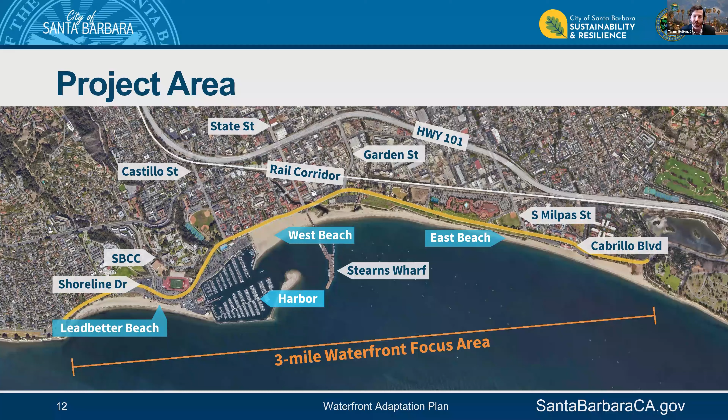Because of its location and elevation, it's a place that's particularly vulnerable to coastal flooding, coastal storms, and coastal erosion. The waterfront has a shoreline that has only ever told one consistent story, and that is ever changing.

From the thousands of years that the Chumash lived along a naturally shifting coastline of dunes, wetlands, and beaches that was naturally reshaped by winter storms and currents, to the creation of Stearns Wharf in 1872 that fixed a point on an otherwise ambulatory coast and created a permanent industrial edge that spurred year-round use to our waterfront.

The shoreline was forever changed when the harbor was built, which trapped sand that would otherwise move with currents down the coast and has created the beaches as we know them today.

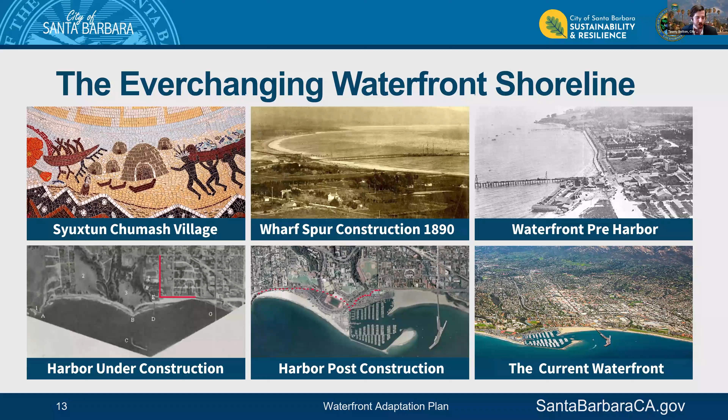We now find ourselves at that next major inflection point when we must take deliberate action to address the impacts we faced during recent storms and the challenges we anticipate to see in the future with continued sea level rise, to save our sandy beaches, to protect our harbor, and to protect our inland areas.

For the purposes of this project, we are primarily focused on two broad categories of hazard impacts. The first is the area where waves are actively crashing and causing damage, and the second is the inland flooding that occurs from the ocean.

At the end of the day, it's truly not sustainable for us as a city to spend $3 million in cleanup and repair costs from a single large coastal storm like we did in 2023, which is one of the core reasons why we're doing this work effort.

And during that high water level condition, we see that the ocean was right up to the ice plant and in some cases spilled up and over onto the bike path.

This is important because over time, as the shoreline has migrated inland as its beach has eroded, not only have we lost access to the recreational component of a sandy beach area, but as that shoreline has moved inland, so too has the risk of hazard impacts to the area around that.

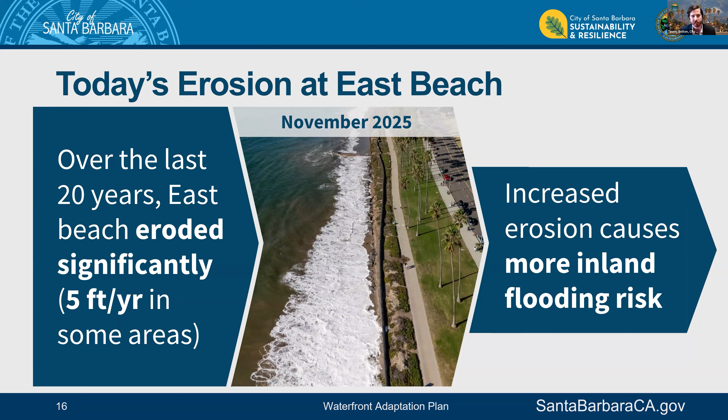Thankfully, there are different dynamics along our coast, and during the same time period of analysis, Leadbetter was a generally stable beach, and West Beach actually grew slightly during the same period.

When we look forward in time, we see that our risk profile will evolve and our challenges will only grow with continued sea level rise.

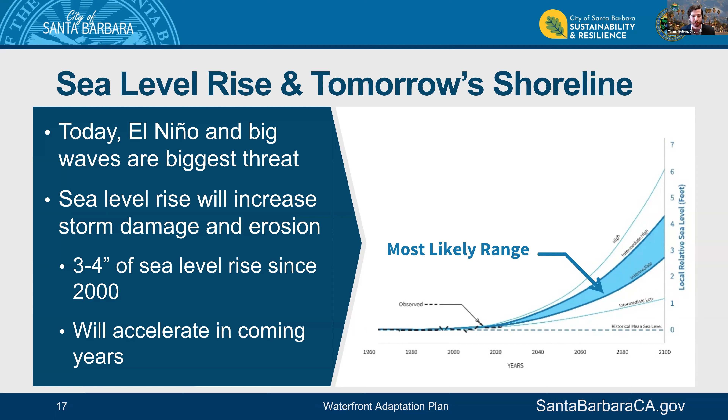As a quick data point, we've experienced 3 to 4 inches of local sea level rise relative to the year 2000 based on our local buoys. And we anticipate that that value and rate of rise will only accelerate in the coming years, which will create quite the challenge. Before we dive into the waterfront, I want to take a quick moment to really zoom out

This is important because over time, as sea levels continue to rise, the shoreline will continue to get squeezed out as that shoreline marches inland, making access to dry sandy beach less and less with more and more tidal conditions over time. This will increase the importance of and the demand for our low-lying waterfront beaches

which is a core reason why during this project, we are really trying to focus on preserving and maintaining that sandy beach experience along our waterfront area for as long as possible.

Shifting now into the waterfront itself, this and the following slide show the future position of our shoreline with sea level rise.

These projections assume that all of our existing infrastructure remains, all of those historic processes remain, and all the current management decisions continue, including dredging at the harbor. What's new is the addition of sea level rise on top of those historic and current processes.

The green line, closest to the ocean, represents 0.8 foot of sea level rise, or the shoreline in about the year 2050. The middle red line is 1.6 feet of sea level rise, or the year 2065. The inland-most blue line represents 2.5 feet of sea level rise, or the shoreline position in about the year 2075.

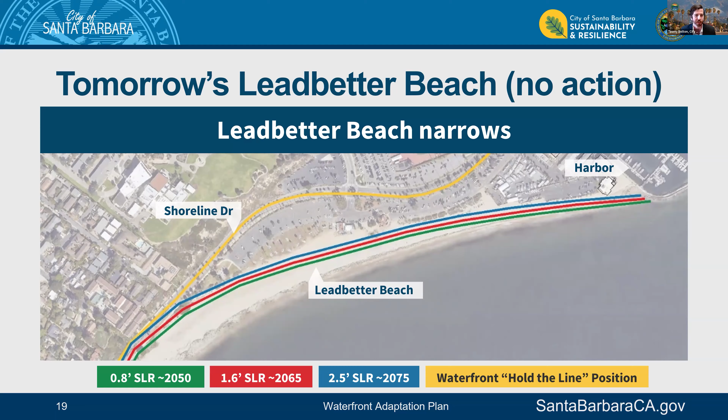Starting at Leadbetter and working our way east, within the next 50 years or so we could essentially lose a good portion of the sandy beach area along Leadbetter, with it essentially lost in front of the harbor commercial area and faring a little bit better in front of Shoreline Cafe and the Leadbetter picnic areas.

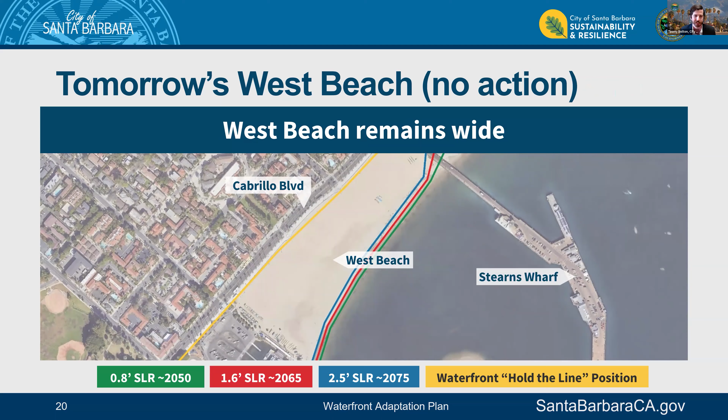Looking at West Beach, we see that it too begins to have some erosion, but it remains wide and sandy, well beyond the 30-year focus of this work effort, which creates this profound opportunity to really focus on West Beach as a sandy beach destination. This is important, especially in the context of East Beach.

As I mentioned, we have this challenging historic erosion condition, and when you add sea level rise on top of that historic challenge, that challenge only grows. Based on our analysis, essentially the good portion of the sandy beach area could be lost by about the year 2065. And at some point between 2065 and 2075, this entire area could erode all the way back to Cabrillo Boulevard, which creates quite the challenge.

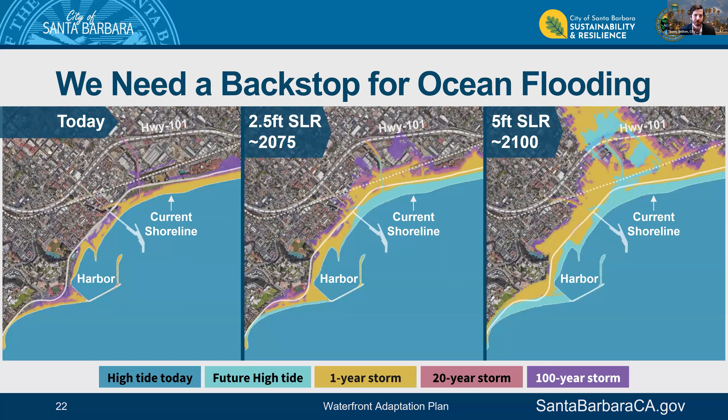What we see is that today, when we have a really big coastal storm, Cabrillo Boulevard and some of the areas just on the other side of it are already at risk of flooding from the ocean. Over time, with continued sea level rise, the extent and magnitude of that risk only grows. The point here is to emphasize that we need some sort of vertical protective measure, something raised above grade, to prevent water from the ocean from flooding our lower downtown, our inland areas, and our inland neighborhoods.

While I want to emphasize that we certainly have a challenge on our hands, it's truly not all doom and gloom, and there is a toolbox of proven solutions. We often get asked, can't you just put in a continuous seawall or rock revetment along the entire waterfront and call it good? To a certain extent, we could.

These types of hard engineered solutions do a pretty good job of protecting what's directly behind them. The massive trade-off, though, is that because they're hard structures, waves coming in bring energy with them, hit against these hard structures, and redirect that energy to the soft sand around it. The byproduct is that it can erode those beaches around them and narrow the beaches far faster than if we didn't have those hard structures there at all.

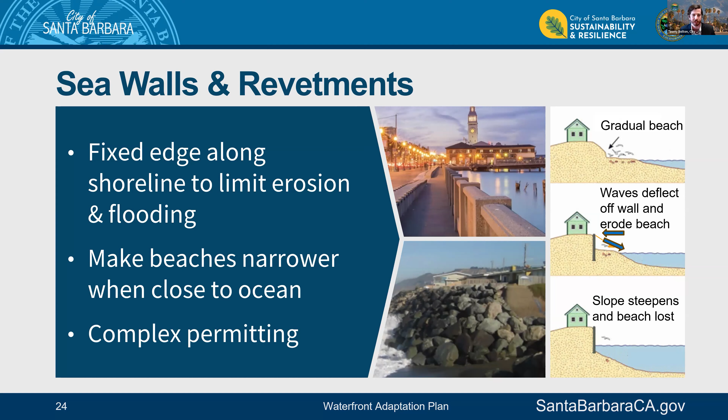So if we have this high-level goal to really preserve the sandy beach experience, using these hard structures as a widespread solution can be counterproductive to that ultimate goal. That said, they can make sense in certain locations where you have critical infrastructure like the harbor that can't be easily moved. Beach nourishment, sand berms, and dunes are softer solutions that either mimic or restore natural processes as part of nature-based approaches to help widen our beaches.

We do some of these things today, including using seasonal sand berms. Their primary Achilles heel, though, is that if you have really big storms and big waves bashing against them, they can be quickly lost to the sea or pushed inland.

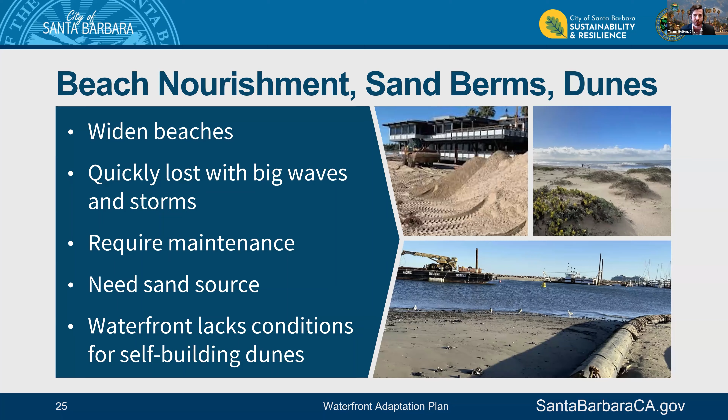One of those early photos that showed the Harbor West and Leadbetter parking lot areas covered in sand—that sand came from a seasonal sand berm that was previously located in front of that parking lot, had been hit with some big waves, and then was pushed into that parking lot. Because of that, they require regular maintenance as well as a sand source to create and maintain these types of systems.

Groins, headlands, and artificial reefs are another option within the toolbox. These are structures that extend perpendicular to the shoreline out to sea and can help widen sandy beaches by trapping sand that would otherwise move with currents down the coast, similar in a lot of ways to what our harbor does today.

The primary trade-off with these approaches is that because they trap sand, they can create downcoast impacts and starve downcoast beaches of sand. This can create significant political and legal liabilities and also makes them challenging to permit. These approaches require expense both to install and to maintain over time, as well as an external sand supply to ensure they stay full of sand and don't create those downcoast impacts.

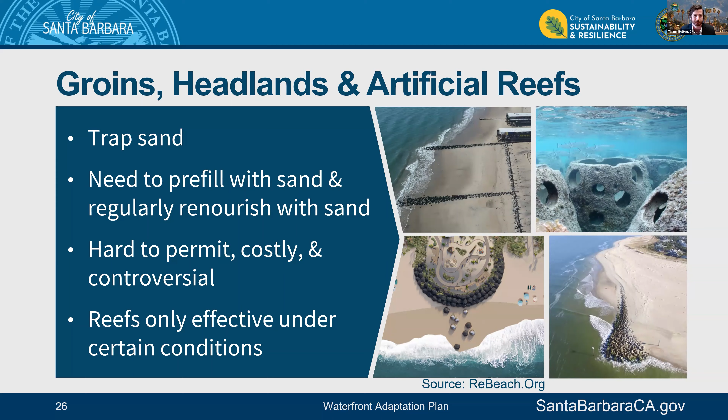Fundamentally, relocation or removal of development has to be part of the conversation if we're prioritizing the sandy beach experience. It's a great way to take assets and infrastructure currently in a risky hazard area and move them out of that area to address the risk. The challenge and trade-offs come in that some things aren't easy to move, like the harbor.

Some things don't have replacement sites available for them. You also have to consider impacts to uses, revenues, and existing leases when talking about moving existing businesses or revenue-generating assets, to consider how we will continue to fund and maintain the waterfront, as well as pay for some of these infrastructure improvements.

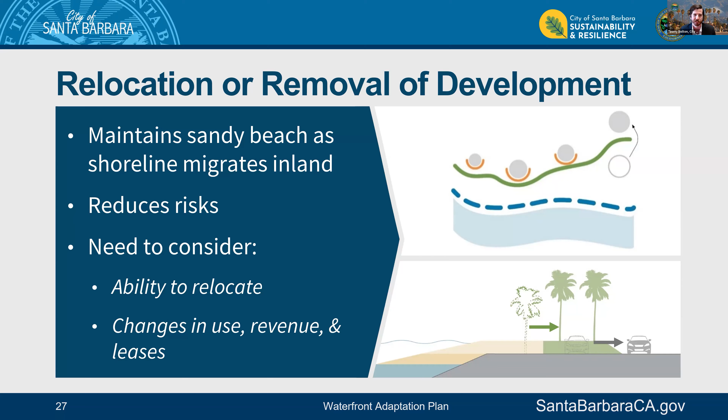I know I've talked a lot about coastal hazards, but I want to emphasize that we're taking a holistic approach to this project. If we're going to do this massive infrastructure investment to our waterfront area, why not also do it in a way that improves the experience for all of our users?

The ideas on this slide are all things we heard during our initial community engagement campaign when we asked what people love about the waterfront and what we could do better. A key thing we heard is that there needs to be a safe way to walk and bike throughout the entire project area. There are notable gaps in the network today, namely in the Harbor West and Leadbetter parking lot area, shown in that top left graphic, where users are walking and biking through a parking lot without separated space, creating potential conflict with cars. That's one thing we plan to address through this project.

West Beach is challenged today by how the storm drain system operates. The storm drains outfall below the ultimate level of the sand, which creates pooling and compaction issues, shown in that middle photo. That's something we plan to address and really reimagine this space.

There are certainly great moments and places along the waterfront, but there are also spaces that aren't necessarily as connected or welcoming as they could be. This is a theme you'll see embedded in some of these ideas later, to really improve the urban design experience for all of our users.

We've heard clear demand for additional facilities, everything from boat storage to bathrooms, so you'll see that included. We also see a clear need to enhance economic vitality, both to support our local economy and to look for ways to generate revenues to help fund some of these infrastructure improvements. Finally, there's a rich history of recreational activity along our waterfront. We want to celebrate that and have it continue forward for as long as possible.

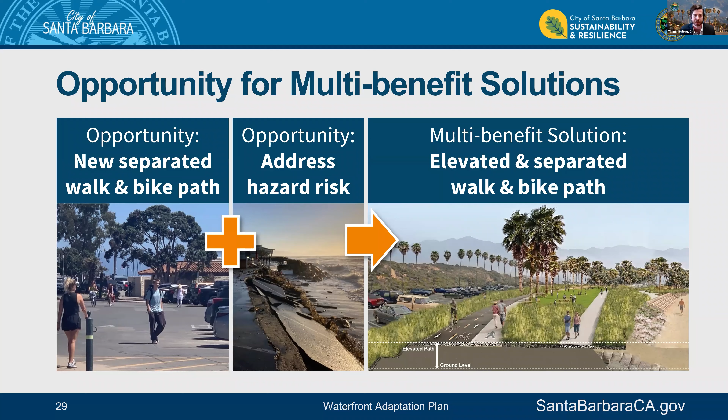But it could also include that raise component, which provides that vertical element required to prevent our inland areas from being flooded from the ocean when we have big storms and high water levels.

So taking this all into consideration and pulling together a preliminary list of things we're considering studying further in the next project phase to ultimately build towards a recommended solution and approach, we have 4 primary goals as shown here.

It's really first and foremost all about saving that sandy beach experience and enhancing recreation for as long as we can. It's protecting the commercial working harbor in place, boating and all of its coastal dependent uses. It's protecting our inland areas from flooding from the ocean, and it's providing a safe and separated way for our folks to walk throughout the entire project area and portion of the waterfront, ideally designed in a way that also provides that flood protection component.

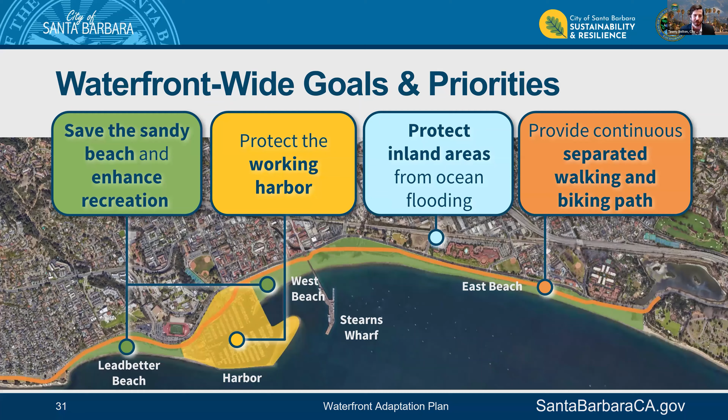For this project, we primarily envision 3 types of projects. The first are the so-called quick wins. These are the low-hanging fruit, lower cost, just-do-it type projects that can largely be accomplished with existing city budgets. These are things like restriping parking lots, minor drainage improvements, and using temporary flood walls when we have storms to provide some flood protection. These are things we would begin doing as soon as the plan's adopted.

The so-called core measures are really the bread and butter focus of this work effort. They're the things that provide comprehensive and holistic hazard protection for at least the next 30 years or so, things like that elevated walking and biking path.

We're also considering so-called future options. These are things that aren't necessarily required for the types of hazards we anticipate seeing over the next 30 years or so, but are things that could be required later in time, or are things that fundamentally change the physical dynamics of the coast, things like groins, things like headlands.

The way we see these projects coming together is that the quick wins are stopgap measures while we work on funding, permitting, and ultimately constructing those core measure projects, which we would begin working on immediately after plan adoption, and would be required regardless of which future options we ultimately consider.

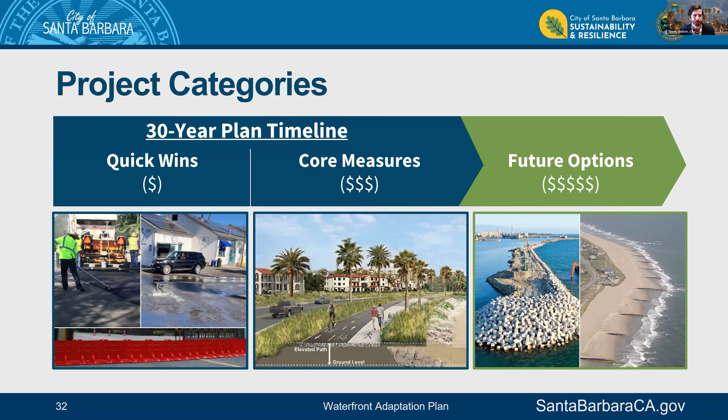So diving into it, starting first at Leadbetter Beach, and then we'll work our way east through the project area. The vision for this space is really all about a sandy beach and recreation destination.

The quick wins here are intended to address the pressing safety and flooding fixes. From a safety standpoint, we really mean the transportation safety component, so exploring this idea of taking the edge of the paved area and restriping it in a manner similar to what you see in that top left graphic, where you have separate space for folks to walk and bike.

Also exploring the use of temporary deployable floodproofing measures in front of Shoreline Cafe, as well as the Leadbetter restroom. Exploring the use of a low curb wall at the edge of the paved area to provide that protection and prevent it from undermining and collapsing into the ocean, like we showed in one of those early graphics.

And because there's the potential to displace some parking by providing that new restriped area to walk and bike, we're exploring capturing some unused space that's adjacent to Shoreline when it comes down the hill. There's unused space between the roadway there and that parking lot, and so we think by expanding that parking lot a bit, we can capture some additional parking spaces over there and in balance end up with more or less the same that we currently have today.

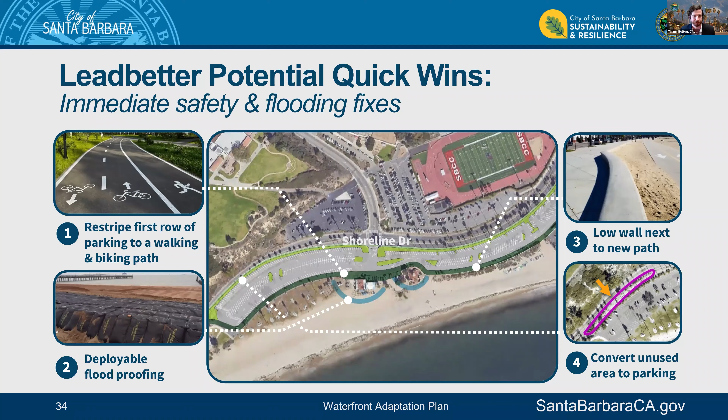The core measures are really all about this idea of saving the sandy beach by strategically moving things inland over time. Exploring the idea of taking area that's currently park and converting that to sandy beach, taking the area behind that and converting that to a park-like area that could also include space for relocated facilities and assets. And then behind that, have the elevated walking and biking path to provide that safe transportation function, as well as that ultimate backstop when you have big storms, when you have high water levels, to provide that inland flooding protection.

I do want to mention that when we're talking about strategic relocation, these things can be done in phases or based on triggers. So as an example, Shoreline Cafe or the Leadbetter restroom could be relocated when we have replacement facilities available or when we reach specific thresholds on the ground, like when they're no longer safe to operate and use.

As part of this exercise, there's the potential to impact some existing parking within this area by strategically moving things inland. So we're exploring opportunities to provide replacement parking outside of the hazard area on the north side of Shoreline Drive.

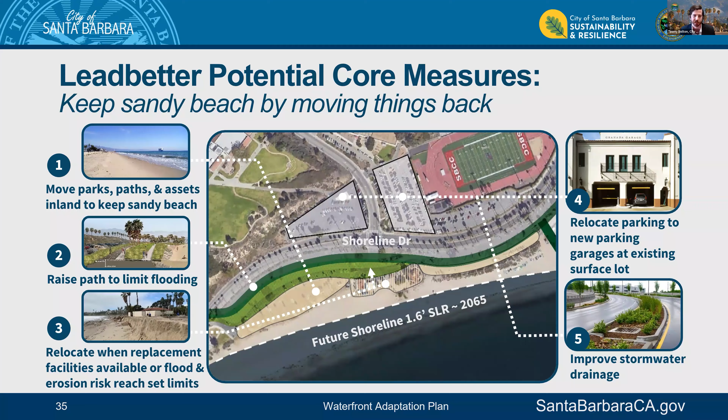One idea is to convert some of those existing parking lots near Santa Barbara City College into new multi-story parking garages. Also exploring ideas to improve stormwater drainage in this area to address some of the existing challenges we currently face. The potential future options are really an extension of the strategy of strategically moving things inland to provide space for the shoreline to naturally migrate inland over time and remain sandy.

Things could be moved in further. The walking and biking path could be raised higher to provide protection from bigger storms. I also want to mention on this graphic and all the other graphics, where you see this green area, that could be a lot of different things. It could include park area, it could include space for relocated assets, and it could also include public restrooms and things like that.

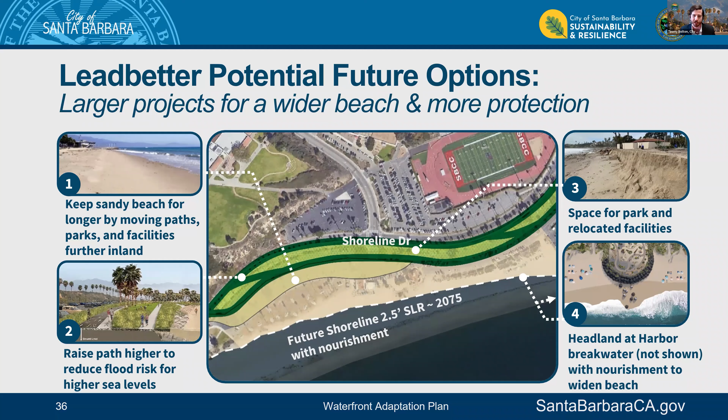What's new in this concept is the idea of exploring a potential headland at the edge of the harbor breakwater area, which you'll see in the next section, as a means to both provide additional hazard protection to this area, as well as a means to widen the sandy beach for a bit longer.

Shifting now to the harbor, where the vision is really all about a commercial fishing, recreation, and public access destination. The quick wins here are quite similar to that at Leadbetter: exploring deployable floodproofing measures to protect key assets during storms, doing minor drainage improvements in the harbor commercial area, and continuing that restriped area to provide space for our users to walk and bike.

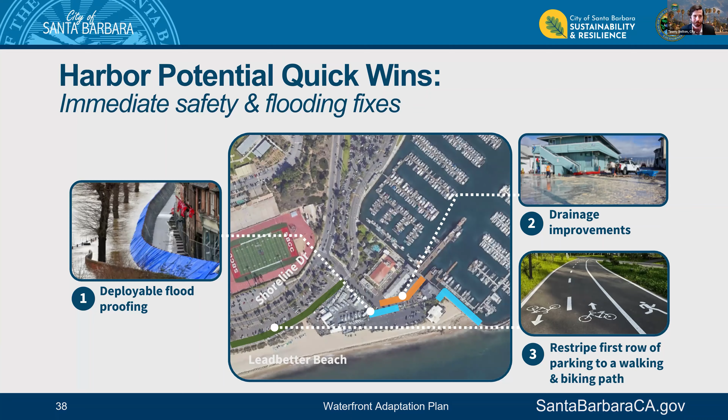The potential core measures are all about flood protection while prioritizing public access and boating. The big move here is exploring this idea of a new raised rock revetment in front of the entire harbor commercial area, that would connect from the edge of the breakwater around the entire harbor commercial area and then connect to the area behind it.

This would provide hazard protection for the boating and coastal dependent uses and everything behind it. This could include a new pedestrian promenade on top of it to provide a much better connection for our users coming from Leadbetter, connecting it to the harbor breakwater itself, as well as providing 360 circulation for users to safely walk around the entire harbor commercial area. This could include stairs down to the sand, the beach, and the water.

We know there's high demand for the limited space within the harbor commercial area itself. So as part of this exercise, we're also exploring methods to really improve public access and boating within that limited space. As with our other areas, we're exploring opportunities to both enhance and strategically raise the walking and biking path to improve public access and safety for our users, as well as to provide an ultimate backstop and flood protection component.

Another idea is to look at ways to generate new revenue through this work effort to again support infrastructure improvements and ongoing maintenance and management. One idea is to explore taking a portion of the harbor main parking lot and converting that to some other use. This could include shops, it could include boat facilities, it could include other things that could do some economic development, generate some revenues.

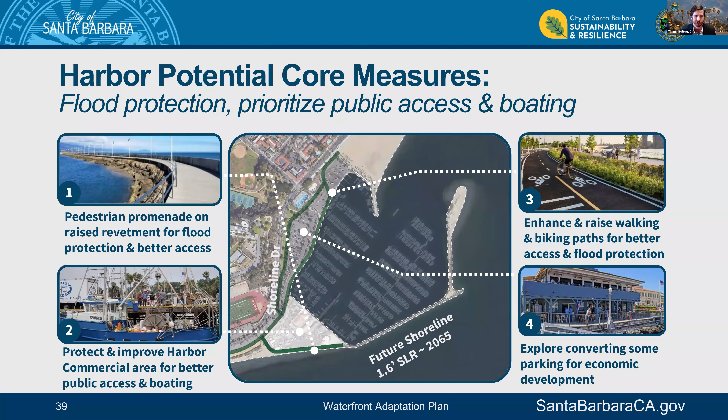The potential future options are really all about additional flood protection and additional hazard protection, exploring opportunities to raise all of the paths and edges higher to withstand bigger storms and higher water levels. This is where that idea of the headland is introduced as a potential method to provide some additional hazard protection, and also widen the sandy beach area in front of the harbor commercial area itself.

Also exploring different ideas on how we can protect the marina itself through a potential sand trap at the mouth of the harbor, as well as doing a wave screen in the bottom right hand portion of this graphic, to provide some protection from big wave events.

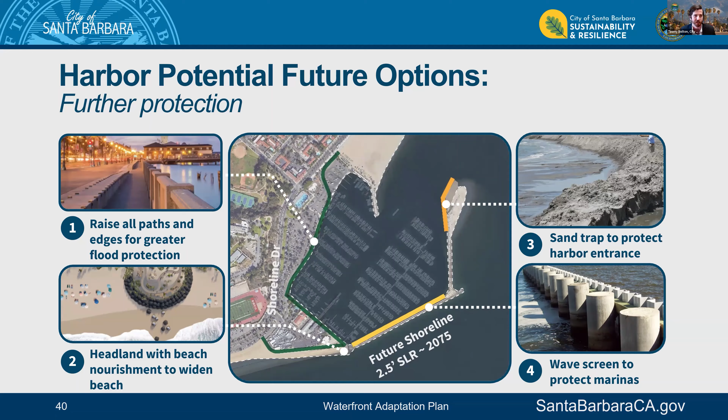Shifting now to West Beach, the vision here is really all about making it a premier sandy beach destination. This is a relatively wide and stable sandy beach for a long, long time, so there's only one category of project that we're currently considering here, and its core measures really all point to that end of a premier sandy beach experience.

The first thing we need to do is really address that stormwater challenge. One idea is to really consolidate all of those pipes so that they don't individually outfall, pool, and pond on West Beach. So we consolidate them and then relocate and reroute them, potentially to the base of Stearns Wharf or so, which should significantly improve the sand quality in this area.

If we really want to lean into this idea of a sandy beach experience, a place you take your family for the day, we need to add some facilities to support that experience. So we're also looking at opportunities to add restrooms, showers, a cafe, beach concessions, and similar amenities in and around this area, currently demarcated in that orange area in the bottom left portion of this graphic.

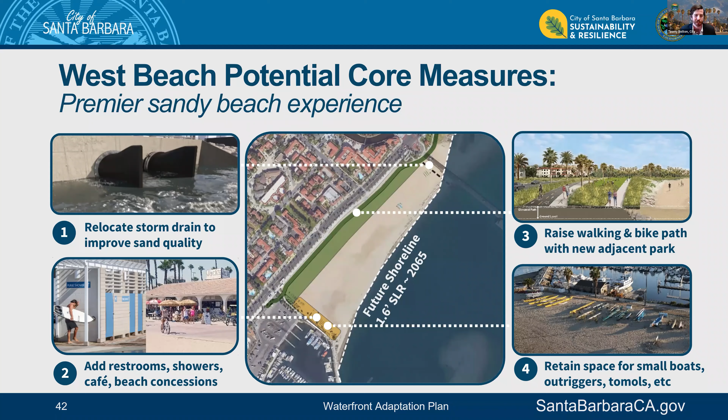As with our other areas, we're exploring opportunities to do that elevated walking and biking path to provide that last line of defense, protection from coastal hazards. This could also include a new adjacent park area, providing a much more welcoming and connected experience for users traveling between the harbor commercial area, Stearns Wharf, Lower State Street, and the lower downtown. We also intend to retain space for our small boats, outriggers, and other things currently stored in West Beach, ideally in a more space-efficient means.

And finally, East Beach. The vision here is quite similar to that at Leadbetter, about preserving sandy beach and a recreation destination for as long as we can. This area is certainly challenged though by that highly erosive condition, as we talked about earlier. That being said, the approach remains similar: taking area that's currently park, converting that to sandy beach, and then behind that, having that ultimate vertical backstop of the elevated walking and biking path to prevent our inland neighborhoods from being flooded from the ocean.

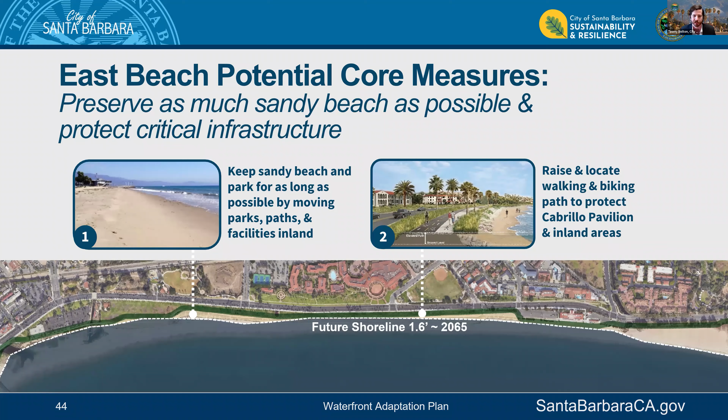The potential future options here, we run into this paradigm where we really can't move things back further. Things have been relocated and pulled back to Cabrillo Boulevard, so the question becomes, are there mechanical engineered means we can use to widen the sandy beach to provide that experience for longer and some additional hazard protection? As part of that, we're considering exploring groins, headlands, offshore reefs, and all the trade-offs that come with those types of solutions. The elevated walking and biking path could be raised higher for bigger storms, more resilience.

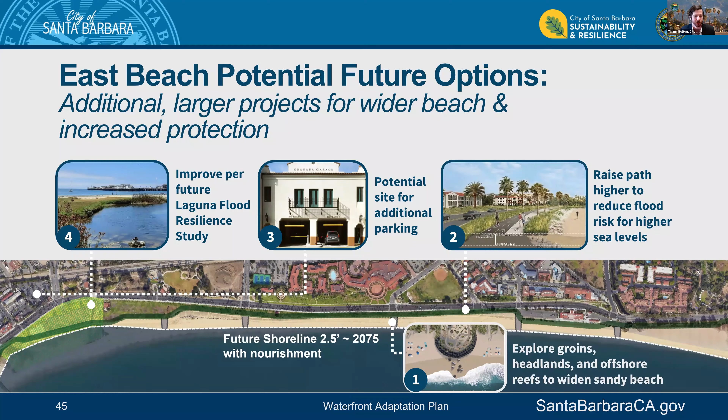As with our other areas, we're exploring opportunities to provide additional coastal access parking, looking at existing surface lots and considering whether those could be multi-story. Demarcated here is the Garden Street lot at the corner of Cabrillo and Garden Street. We've also earmarked some space for the outcome and results from the Laguna Flood Resilience Study that we're about to kick off, to improve some resiliency in that watershed.

So I realized that was a lot, and the question becomes, where do we go from here? We started doing community engagement in early March, kicked off at council, and have been to quite a number of city advisory bodies, boards and commissions. We've also been doing community events and pop-ups, including at Earth Day, with a pop-up along the waterfront and a bunch of A-frames out. We launched a community survey a couple weeks ago that we'd love to get your input on.

We're doing direct Spanish speaking engagement via our partners at the Promotores Network, and we'll be concluding this outreach window really by early June. I believe it's June 4th we'll be at Council Sustainability Committee to share what we heard from this process, from all of that input and the open houses like this one. We'll then spend the summer and the early portion of next year doing follow-on technical analysis of all these different approaches, with a goal of having a draft plan released about a year from now in spring '27 that will include a recommended approach, funding strategy, a defined implementation pathway, and recommendations about what we should do along our waterfront. We then have a goal of returning to City Council for final consideration and adoption by about the end of 2027.

The best way for folks to get involved and to learn more is to visit our website. We have all of our materials up there, all of our presentations, some recordings, other materials and handouts. We also have our email list on there, and would encourage you to sign up for that to get project updates and learn more. We have a survey that is live that we'd love to get your input on. It asks questions about all of these ideas that we introduced today.